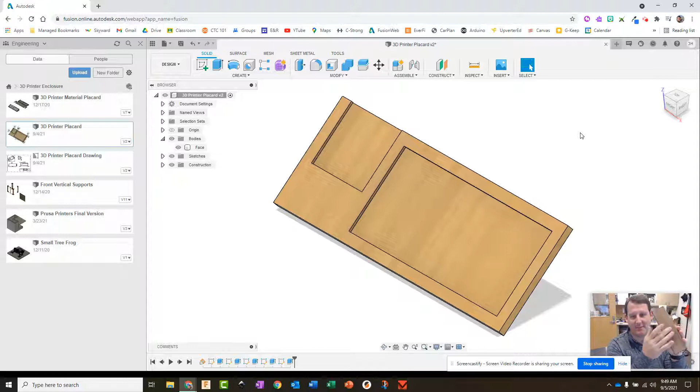All right, welcome back. So right now we're going to build in the two side pieces and the bottom piece. Let's jump right in. To build the side pieces, I'm going to take a look from the right side of my model, and I'm going to create a sketch here on the right face.

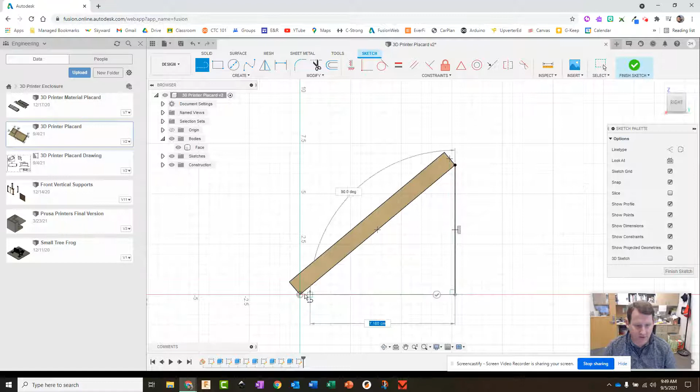You could start on the left, doesn't really matter. All I'm going to need to do here is just draw a triangle that starts at the bottom corner of the face, goes straight down 90 degrees and straight over. Now I've got the main part of it done.

I need now to build in these tabs here so that the side will join strongly to the top. And I want those tabs to go through two layers, but not all the way through the third layer. That way they're kind of hidden from the front.

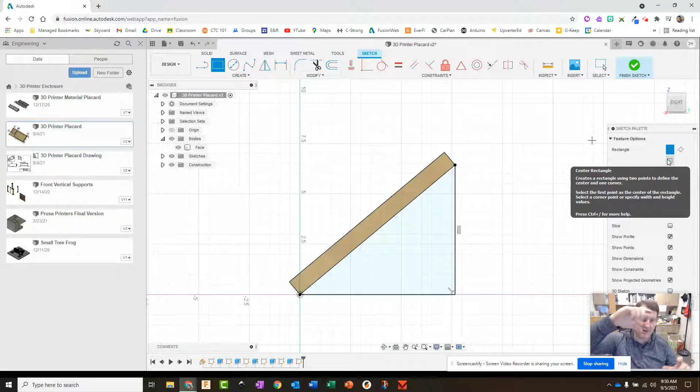So I'm going to use a rectangle tool. These two rectangle tools, the 2-point rectangle tool and the center rectangle, all create horizontal or vertical rectangles. If you need to tip a rectangle at an angle, the way you do it is with a 3-point rectangle tool. So I'm going to use this one.

I'm going to say anywhere along this bottom line here, I'm going to click once, drag it out along that line a little bit, and say I'm going to do a 1 centimeter one to start with. Then I'm going to click and drag up for the third point, and this one I'm going to call thickness.

I'm going to go through two layers, so I'm going to do thickness times 2. That little asterisk means times 2. And I'm going to hit enter, and it's going to position it.

Now notice that these two sides are blue, and that's because it can't get wider, but it can move up and down this line. So we need to fix it in place.

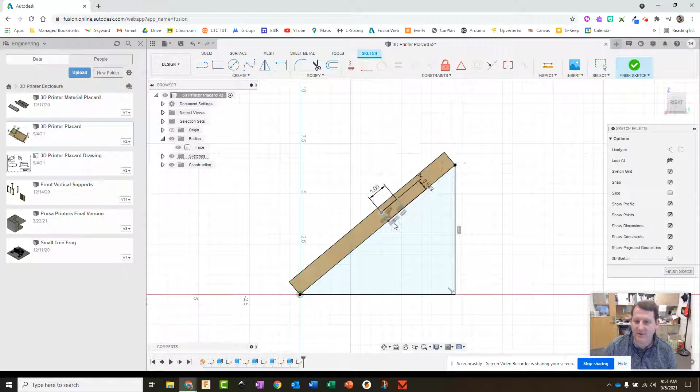To do that, I'm going to use the midpoint tool. I'm going to say take the middle of this line and match it with the middle of that line. Whoops. And there it is. So now it's fixed in place. It can't move. We're all good.

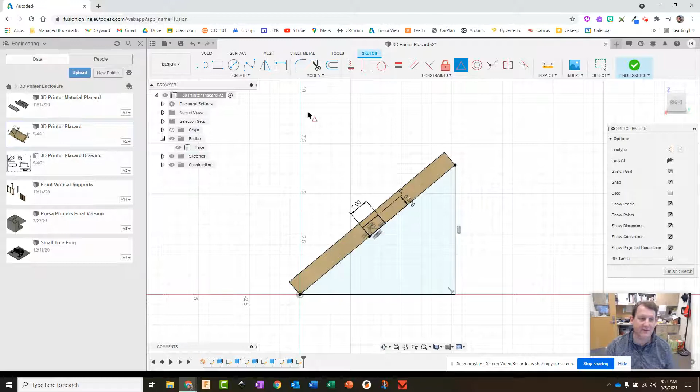So the next thing that we're going to want to do is create a rectangle pattern of this and make 5 of these. To do that, I'm just going to go here, create rectangular pattern.

And I'm going to select not that one. I'm going to select the 3 sides that I need, this one, and this one. And notice that this isn't helpful, right? That's not the way we want to go. And vertical is not helpful either.

We need to tell Fusion 360 that we want to go along this line. To do that, we just simply click over here on directions and then come here and click on this blue line. And notice now we can drag along this direction. Okay, and so that looks good so far.

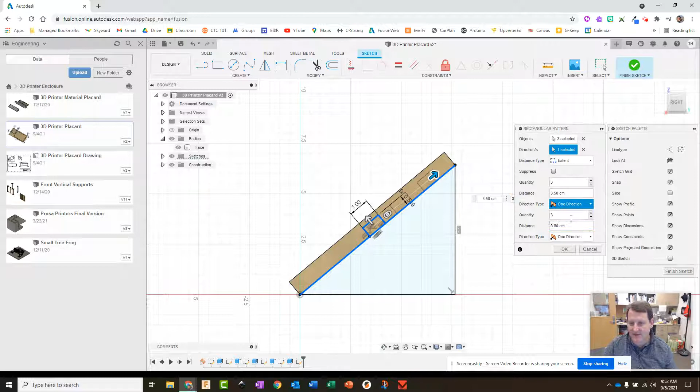So now that I've dragged them a little bit, I can see which one I'm working with. It's this one up here because this distance has changed. I'm going to say, hey, I want this symmetric and I want it to be 5. And that looks actually pretty sharp.

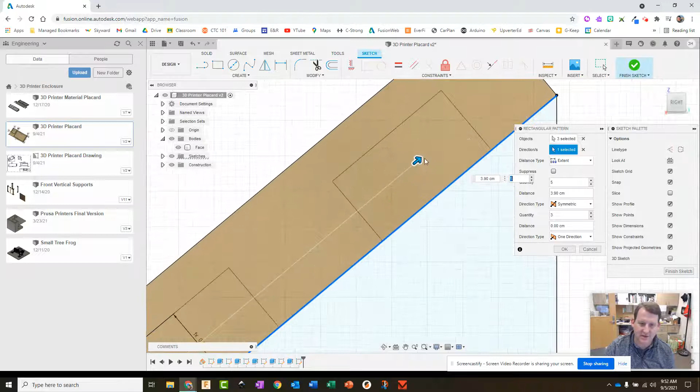That looks pretty good. See how it's jumping in like big jumps every time? That's because I'm zoomed way out. If I zoom in some, now I can have a little more control over how far it jumps. The farther in I go, the more control I have over it. I think that looks pretty good.

Let's take a look from the outside. Yeah, I can live with that. That feels good. And then I'm just going to say okay to this.

Yeah, I'm happy with that.

Now what I want to do is cut the tabs across the bottom, because I want to be able to line them up. Over here in the corner, I don't want to get too close and create a little piece that gets cut off weird. So I'm going to do that now.

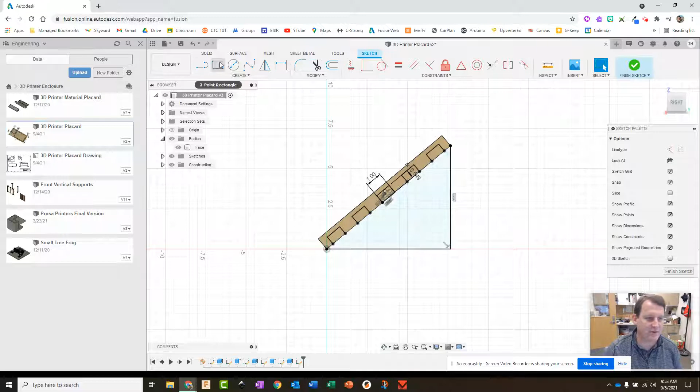I'm going to do this one a little differently. I'll come down here and create a rectangle around the start somewhere, and I'll call this side's thickness. For the other side, let's go a little more narrow - let's go 0.75. We'll see how that looks.

This one I might just do a couple of those and then play around with the spacing. So here's 0.75 again, and this one is thickness, enter, and maybe two more like that. So 0.75, thickness, enter. Notice how those sides are blue - that's because they're not fixed and don't know where to be. They can still go left and right.

So this is 0.75, and this one is thickness, enter. A little trick we can do, if we want all of these to be the same, I can make this one 0.75.

Then what I'm going to do is double click on this one and say I want it to be that one instead, so it matches this one. I'm going to double click on this - whoa, nope, don't want to do that. I want to hit enter first.

So double click on this one, or just click on it once - yep, one click is all you need, and then hit enter. You have to double click to get inside of it, and then a single click to do that. Enter, and then this one, and here, enter. The FX tells you that it's a formula, that it's calculating based on something.

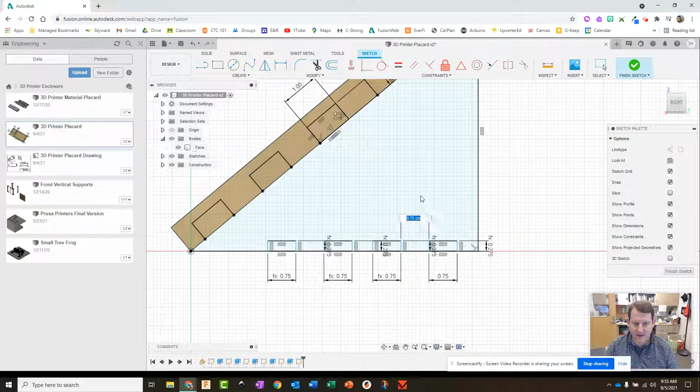Similar thing here. I'm going to use the dimensioning tool and fix the distance between the two of them at, let's do 0.75 - we can always adjust it. Then when I do this one, watch what I do now: I click to put it there, and say I want it to be the same as that one, and then enter.

Then I'm going to do the same thing on the distance between these two, and click on that one and say enter. Now they're all going to be the same.

Now this one over here, I actually want it to be like half the full width, as if there's another one starting out here somewhere. So there's a tricky way of doing this too - check this out. I can go distance from here to here, and I want it to be this, but half of that. So I can just do a slash for divided by, and then 2, and hit enter.

Now notice how they've all gone black like that, because now they are all fixed in space. I still have some room - I can get another one over here, or I can make all of these larger.

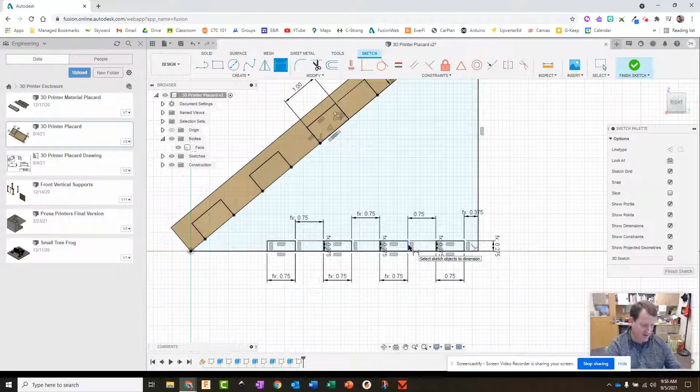Let's see, how many do I have up here? These are all 1 centimeter wide, so let's try that first. Here's the power of this - I'm going to hit here and go 1.0 and hit enter. And it just spread them out a lot. That's pretty cool, that just knocked that out like that.

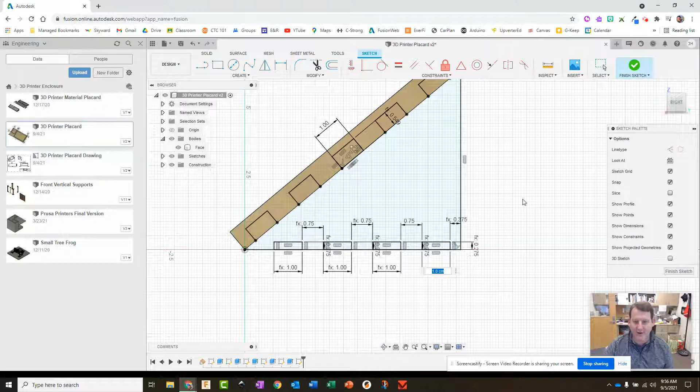That's going to be about where I want them to be. I'm pretty happy with that, so I'm going to hit enter there. That's good. What I don't want is for this one to be so close to this edge that this little triangle breaks off easily. So this is a nice, strong piece of wood still.

Now I need to extrude this, and what I'm extruding is I want this to be wood. So I'm going to do extrusion, and extrude this and these tabs.

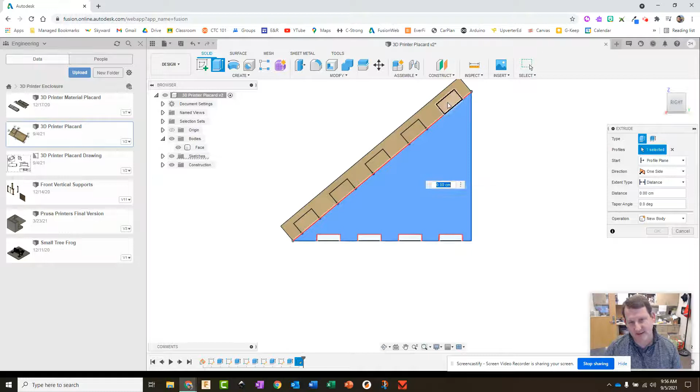Boom, just like that. And I want to extrude into the face, so here I'm going to need a negative thickness. I just flipped it so I could see which way I want to go. Notice it thinks that I want to cut.

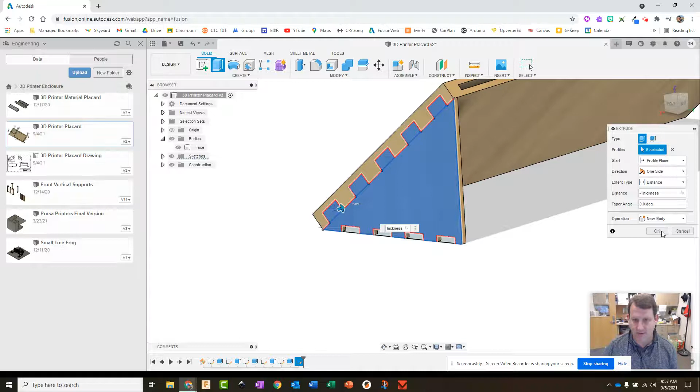That's not true, so I'm going to come down here to cut and say make a new body. Then I'm going to click OK. And now I have the side piece cut.

Now the only problem is if I move the side piece, M for move, I click on it and drag it out of the way. Notice how there's no holes here for these to fit into. We'll need to cut those.

We'll do that after we make the other piece and get it aligned. Then we'll cut both sides at the same time.

So to move it, or actually to create a copy of it, to make a new piece, we're going to use the move copy tool. We're going to click on the thing we want, making sure this says bodies up here and not faces. We're going to do this, and before we move it, we're going to say create a copy. And now we're going to move that copy.

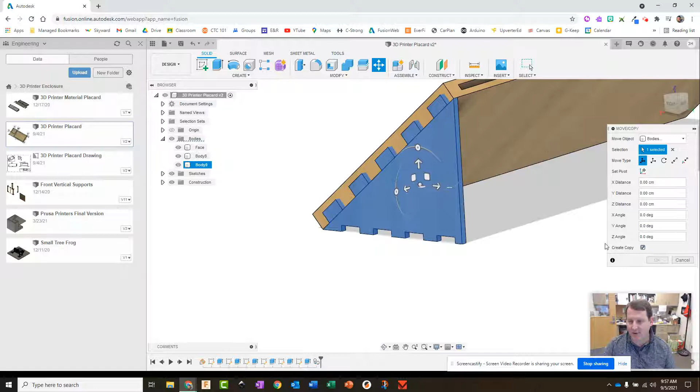Notice how one got left behind. We're going to drag it right down the face like this, and click OK. It doesn't matter exactly where we get it, as long as we get over on the other edge, in the other direction somewhere. Why is it doing that? There we go, good job.

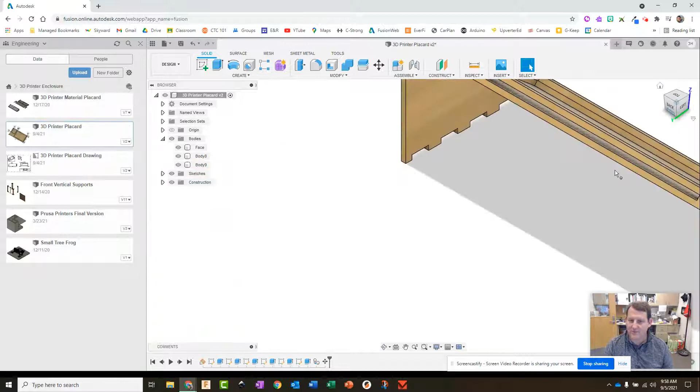And now I'm going to click over here to this top outside corner and move it around so I can see the outside face. Now I just need to align this side with this face.

So I'm just going to use my align tool here in the modify menu. I'm going to go from is the one that's going to be moving, and 2 is where it's going to be moving to. Now when I select this one, I want to make sure I don't select a certain point on here.

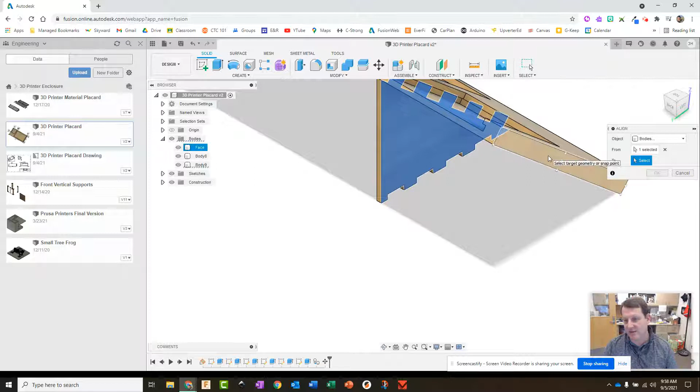And then the 2, the same thing, I don't want to select this point. I just want to select the face here. That'll line the two faces up. And then I'm going to say OK.

Now I need to cut those joints that we were talking about earlier. So I'm going to tip it a little bit so I can see both of them, and I'm going to use the combine tool.

I'm going to say the target body is the thing we want to cut, we want to cut holes in the face. And then the tool bodies are the things we want to cut with, and we're going to cut with this one and this one.

And I want to make sure my keep tools is checked. Otherwise my two tools I use will just disappear when I'm done, and I want them to stay. So I'm going to click OK.

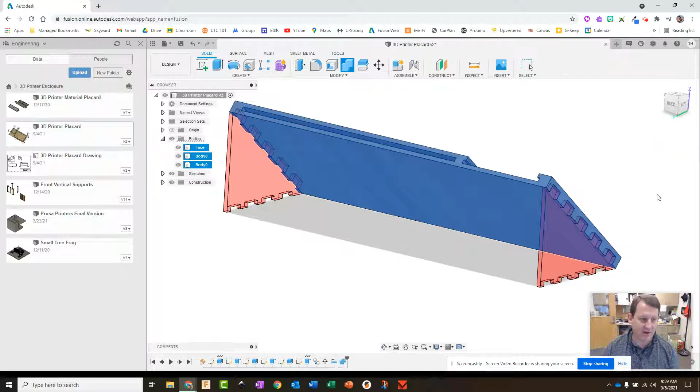And now when I do my move command and I move this out of the way, you can clearly see now there's holes cut for those tabs to go into. So I'm going to cancel that move.

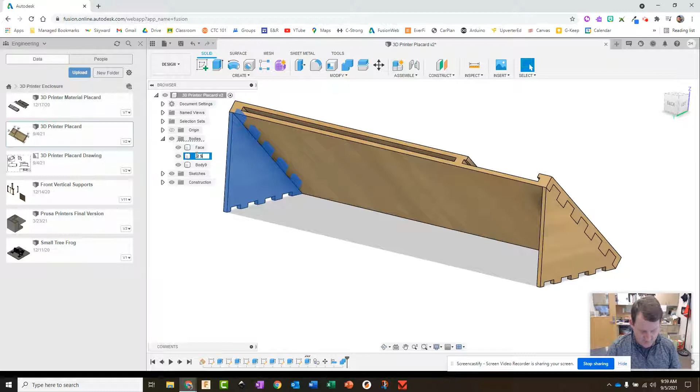And now I need to deal with my body. So I've got a face, I've got this one, which we're looking at the back, so this is actually the right side. So I'm going to rename body 8 to R side, and this one to L side.

Okay, last step is to create the bottom of the piece. And to do that, all we're going to do is flip it over, go to the bottom, and we're going to create, let me pull it up a little bit, a rectangle across the bottom. To do that, we're going to...

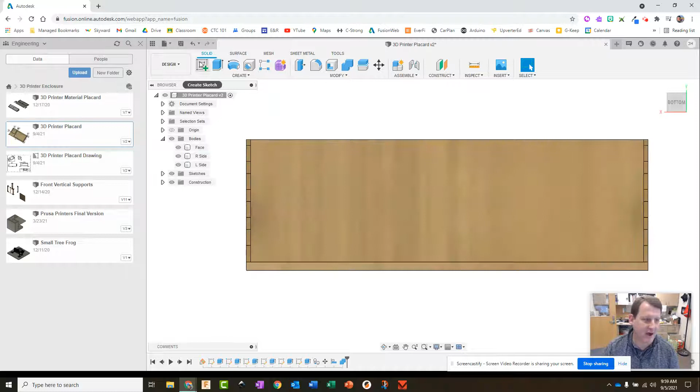Right here on this piece, we're going to create a sketch. Now, did it just flip it over? It did just flip over. That was super weird, I don't know why it did that.

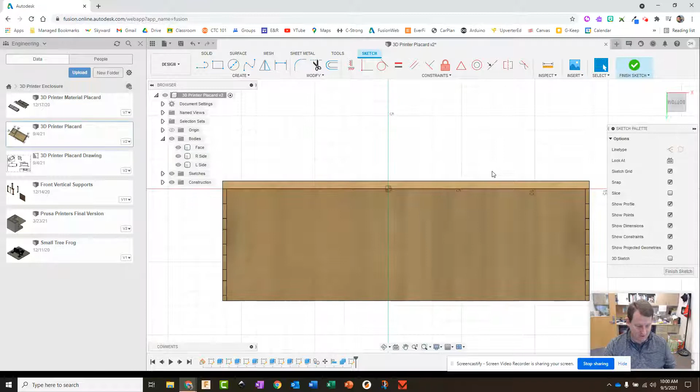So the sketch I created up in the top left, and it zoomed me in and created it right here, which is super bizarre. Maybe I'm going to flip it back over. I don't know why I chose to do that. So there's the sketch I created, and now I need to drag this thing all the way down.

So I'm going to take, let's hide the face, that way we're not seeing it. We want this to go...

Oh, that's going to be tricky. So this is probably a bad way of doing it. Let's not do it this way. So I'm going to actually go back a step.

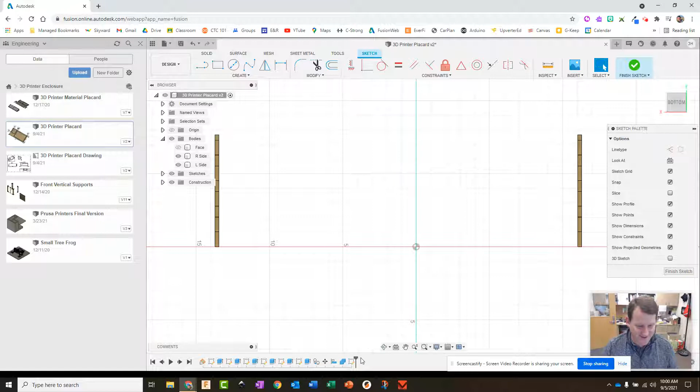I'm going to right click here down on the history marker and say delete all features up to history. That will delete that last sketch that we made. And I'm going to turn the face back on. Let's go back to home and orientate ourselves.

So we actually need to create the piece across the bottom. One way to do it is to flip it over at the bottom. That's probably the most obvious way, and that's the way I started doing it. But we want it to be lined up differently, so let me show you what I mean by that.

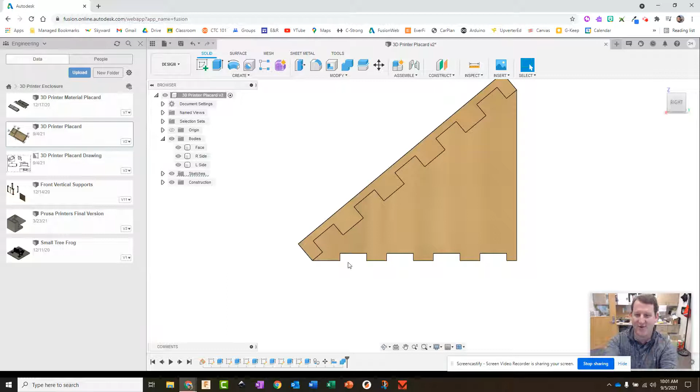I'm going to make it on the right-hand face. This is one of those interesting ways of doing it. I'm going to create the bottom by doing a thin rectangle here and then extruding that rectangle all the way across the bottom. So instead of starting at the face and extruding it a thickness up, we're going to start at the edge and extrude it all the way across, because lining it up will be easier. Let me show you what I mean.

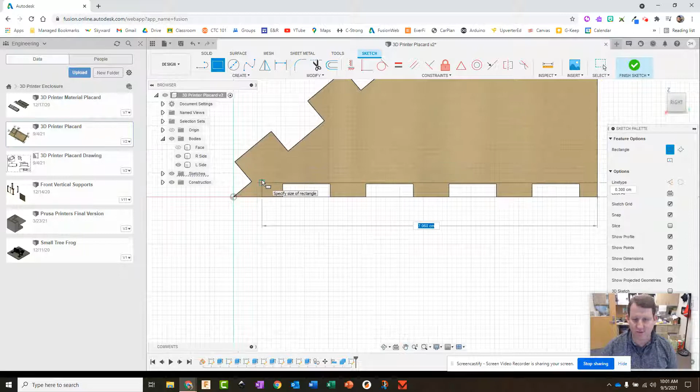So I'm going to hide the face here. I'm going to create a sketch right here in the triangle, and I'm going to start my rectangle for the bottom piece right here at the corner, and run it across. Let me get the other side so I can see the whole thing. And then I want to make sure that this says thickness, right, and it lines up nicely.

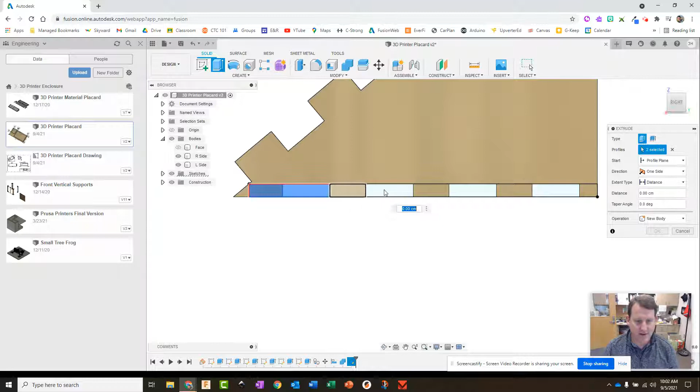Now I want the bottom to stop right there. I don't want it to extend past here into the face at all, because it won't be able to make that cut, since it's at a weird angle. So I'm going to stop the bottom right here, and then I'm just going to extrude this. And I'm going to extrude all of these pieces.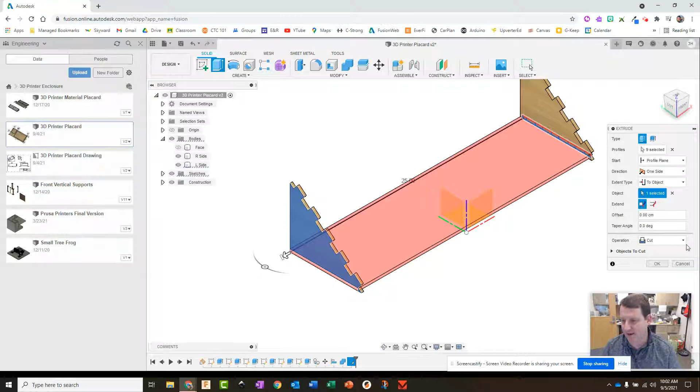I want to extrude them, so I'm going to go look at my model from the top left like this. And I want to extrude this. The distance I want to go is to an object, and I want to go to this face of the object. Now it thinks I want to cut, but I don't. I want to create a new body, and I'm going to click OK.

Now at this point, I can name this one - body 10 is going to be bottom for me. And yeah, that's good. Now I'm going to flip it over. Now I do want to go look at it from the bottom.

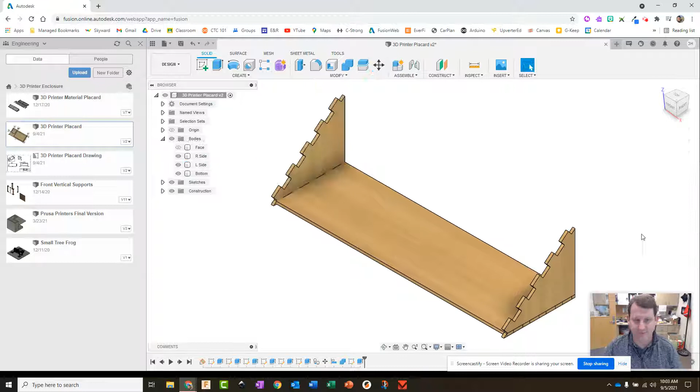So all we need to do now is cut holes in the bottom. Because right now, if I move this out of the way, you can see there's no holes cut in the bottom. To do that, it's a simple combine tool. We're going to take this - we want to target the bottom for cutting, and we want to use the two sides for our tool bodies. And we want to cut, and we want to keep our tools, and we want to click OK.

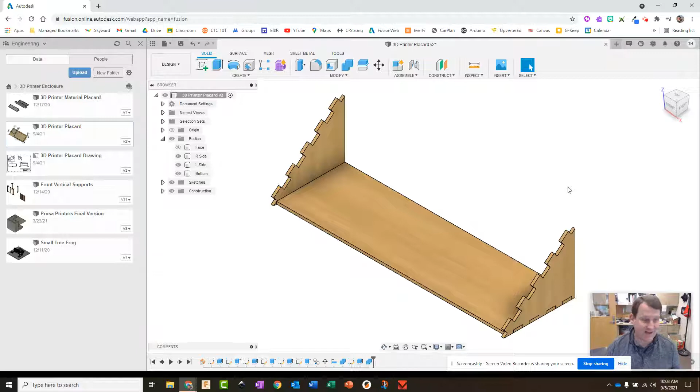And now, when we move this one, bam, all good to go. All right, so that's it for the modeling. Let me turn the face back on. That is the completed model for our placard.

So we'll put down here like printer number 1. Here we'll put the sample for the print job, and here we'll put the information card telling it what kind of plastic and temperatures and all that good stuff.

So the next video will show you how to take this model now, and we need to flatten it out and break it down so that we can actually send it to our laser to cut all the different layers and pieces that go into it. So thanks for watching, and we'll see you soon.